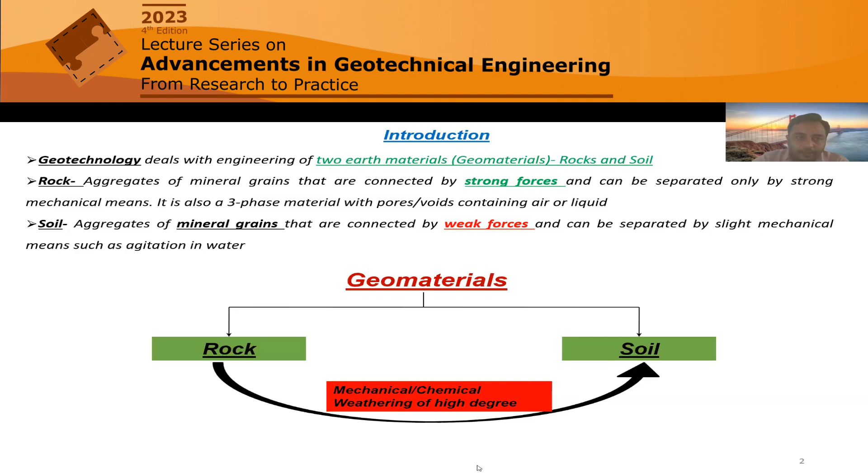As a geotechnical engineer, particularly if we are dealing with rock engineering projects, we have to deal with problems associated with rock slopes, tunnels, foundations, foundations over slopes, and many other problems. These are some examples in which we have to deal with rock mass at the site.

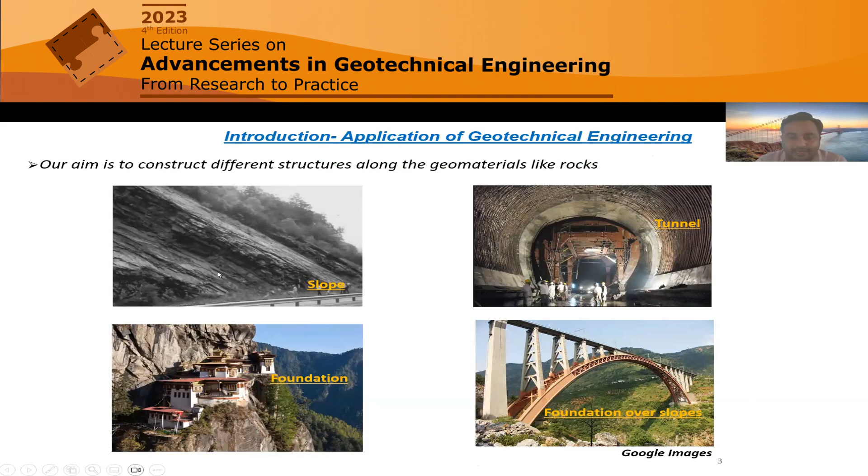Rock, intuitively speaking, when we are talking about soils and rock, rock is a stronger material. We can say that intuitively. However, the problem associated with rock engineering is the presence of discontinuities along the rock.

Due to the presence of these discontinuities, this whole assembly of discontinuity and the intact rock in between is known as rock mass. This whole rock mass on which we have to construct our structures becomes less strong, more deformable.

There will be anisotropic behavior shown due to the presence of discontinuities. Due to the random distribution of these discontinuities along the rock mass, there could be heterogeneity. Scale dependency in the properties comes into picture, and the behavior also becomes time dependent, as we see in the direct shear test when we perform our test under different strain rates or displacement rates.

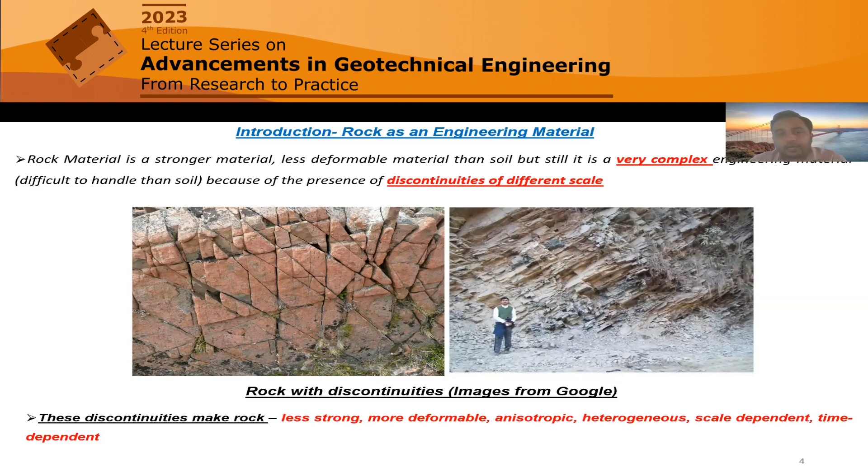When we try to design any rock structure, basically we have to deal with certain steps. There can be some specific steps associated with a particular project, but in general, these are the steps which we generally follow when constructing any rock structure.

Initially, we have to do some geological and topographical investigation at the site. Then we have to do some field observations and measurements at the site, which consist of intact rock characteristics, joint characteristics, joint and discontinuity characteristics.

This includes roughness, JCS, density and pattern of joints, ground details which includes stresses and groundwater table, and some project related features, meaning what type of project we are dealing with—whether we are dealing with slopes or tunnels.

Based on all of these, we can give some rating to these individual parameters. Based on the ground condition, the project related information, and these characteristics, we can find out what could be the possible failure mode along the rock structure.

So if we are talking about rock slopes, there can be different failure modes like planar failure mode, wedge failure mode, and stress controlled circular failures.

Based on this information, we can have some preliminary idea of what type of failure our rock structure can have. This can happen in tunnels also, where we have wedge failures and continuum type shear failures. All this preliminary investigation and analysis can be done on the basis of this information.

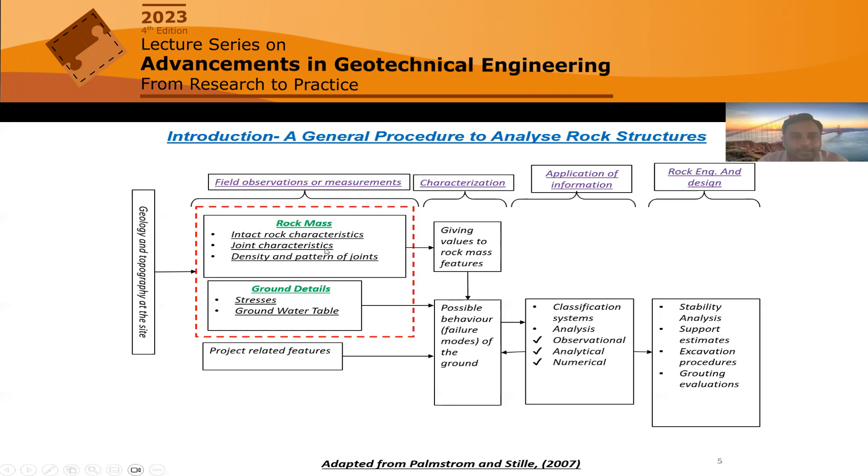Whatever design process we are actually following, we have to find out different properties or characteristics associated with the intact rock, joint characteristics, density, stresses—any input parameter which is required, we have to measure or estimate it in the field.

So the most ideal condition could be that whatever parameters or properties of the rock mass we are estimating in the field are precise values, deterministic values, and have a fixed value.

If we have some mathematical model to analyze our structure—suppose for a tunnel, if I am doing some analysis using a finite element code, finite difference method, convergence confinement method, or any other method—it requires some input parameters.

So if we have a precise or fixed value of that input parameter, we just input that value into the mathematical model, and we can get the output response of the structure which we have to deal with.

This is what is being given here. Suppose we want the elastic modulus of the intact rock from the site. The basic idea I want to give through this slide is that if we get a fixed or precise value of this elastic modulus, then we just input this simple deterministic parameter into the mathematical model to get the output response of the tunnel, for example, in this particular case.

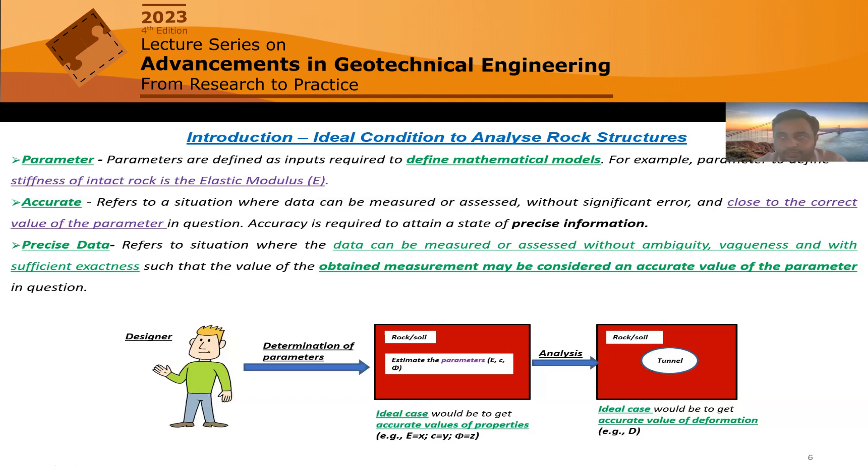However, this ideal case is rarely present in rock engineering. The thing is, we basically have to deal with unpredictability while estimating the input rock parameters. Unpredictability actually tells you about all our deficiencies and inabilities to precisely predict the value of a particular parameter.

So the ideal case was that if we have some mathematical model, we input the deterministic value of the input parameters, and we get the output parameter.

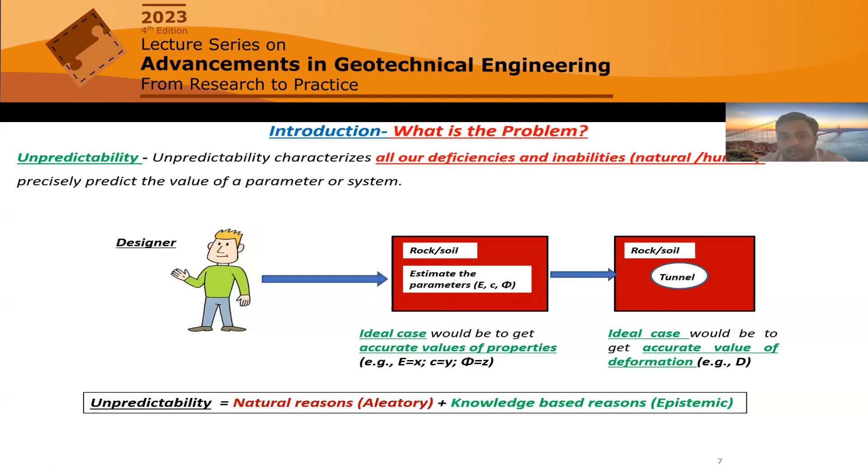However, even if the mathematical model we are very sure of is present, the inputs may not be fixed or precise. This could be due to two major reasons: the first is the natural reason, also known as aleatory variability, and the second is knowledge-based reason, also known as epistemic uncertainty.

Epistemic uncertainty I will discuss briefly in the coming slides. Aleatory variability is associated with the natural or inherent variability of the rock, present due to random orientations of different types of mineral grains along the rock. There can also be differently oriented, randomly oriented discontinuities present along the rock in the form of intra and intergranular cracks.

So the cracks could be along the grain boundaries, or they could be passing through the mineral grains themselves. In both cases, these discontinuities are randomly oriented along the whole domain of the rock we have to deal with, and therefore this inherent variability becomes important when estimating rock properties.

The best part is that when dealing with aleatory variability, we can use some traditional stochastic model to handle it. The idea is, suppose we want to estimate the UCS of intact rock, so if we keep on testing...

We generally extract samples from some locations or boreholes from the site, bring them to the laboratory, and test them. Based on a limited number of tests, we can get some idea of what trend the UCS value of the rock is following, and assign some stochastic model to that. So the best part is that aleatory variability can be handled using standard stochastic models.

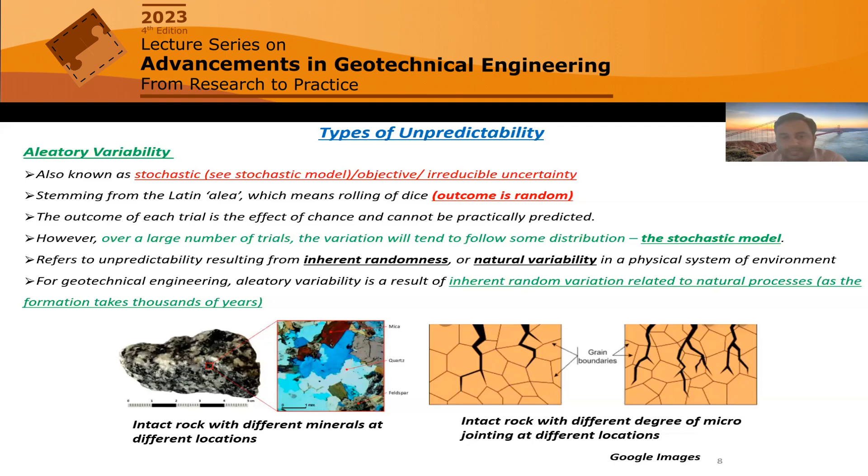So when dealing with aleatory variability, we are assuming we are dealing with objective data. What do we mean by objective data? If I'm talking about UCS, if we have the same samples tested in different laboratories as per standard guidelines like ISRM, we should be getting the same value. There are no personal feelings, opinions, or experiences associated with the laboratory testing when doing the UCS test. Similarly, for elastic modulus, if we follow the standard procedure from the stress-strain response of the intact rock, we should not get different results.

The basic idea is that the output is completely free of personal feelings, opinions, experiences, or any biases. Once we test some number of samples in the laboratory, we can fit a probability model on the data using well-defined statistical methods. Even if you keep testing 25, 50, or 100 samples, the aleatory variability cannot be reduced to zero. The inherent variability will always be there.

For preliminary investigation, if I have this distribution based on limited test data, and I keep testing more and more data, I can reduce this variability, I can reduce this uncertainty, but it cannot be reduced to zero. We cannot have a fixed value of any input parameter we want to estimate.

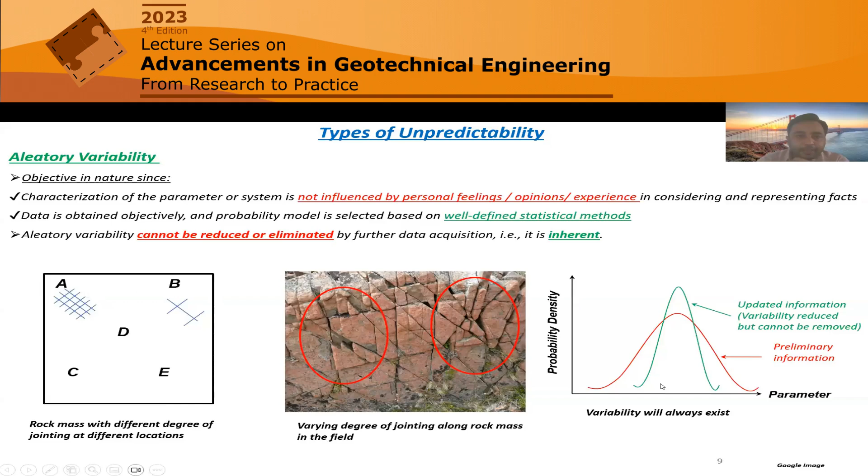How to deal with this variability? The best or simplest part is to ignore it, which we generally do. So what we do, we test some samples, we find out the average value, and we use some deterministic mathematical model based on which we can actually find out the output response of any structure.

Method two is being conservative. We will take the least or worst case scenario. If suppose I'm talking about UCS of the rock, we will take the least UCS value which we have estimated from our samples. We will design our structure based on that least value of the UCS, and then it will be resisting everything. So if you have that much money, and money is not a problem, you can go with it.

Third one is using the observational method, in which what we do is have some preliminary design related to any structure, then we can keep on monitoring that particular structure, how it is actually behaving. Based on that, you can have subsequent designs if the structure is not performing up to the tolerable limit, and otherwise if everything is going fine, you can carry on with that particular design.

And the fourth one is quantifying uncertainty, which is more mathematical, slightly difficult and unconventional for design engineers. In method 4, you have to characterize the uncertainties in the inputs using probability or statistics, and then you can propagate those uncertainties of inputs to the outputs using some probabilistic or reliability methods.

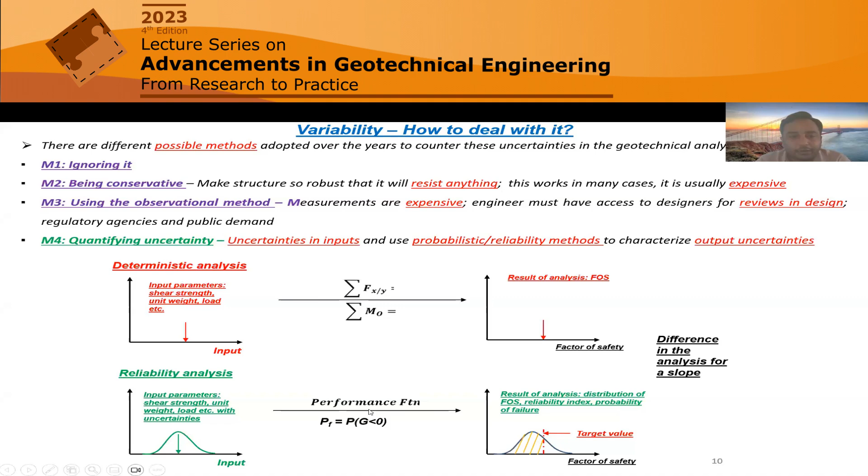So probability of failure, for the factor of safety, is defined as the probability of the factor of safety less than this target value. This hashed portion shows you the probability, and that can be defined as probability of failure. So reliability analysis actually helps us to deal with the variability of the input properties.

How do we perform this reliability analysis in geotechnical engineering? We have to use two mathematical techniques. First one is statistics, in which we have to quantify the uncertainty associated with the input parameters, and then we have to use probability theory to find out the likelihood of specific events on the outputs, considering the quantified uncertainty of the inputs.

Standard statistical techniques are there: chi-square test, KS test, AIC value test. And you can also find out the statistics of these parameters based on the tested data.

If the design decision is not sufficient, or the stabilization measures are not sufficient, then you have to repeat this whole process with some different amount of stabilization measures and all those things.

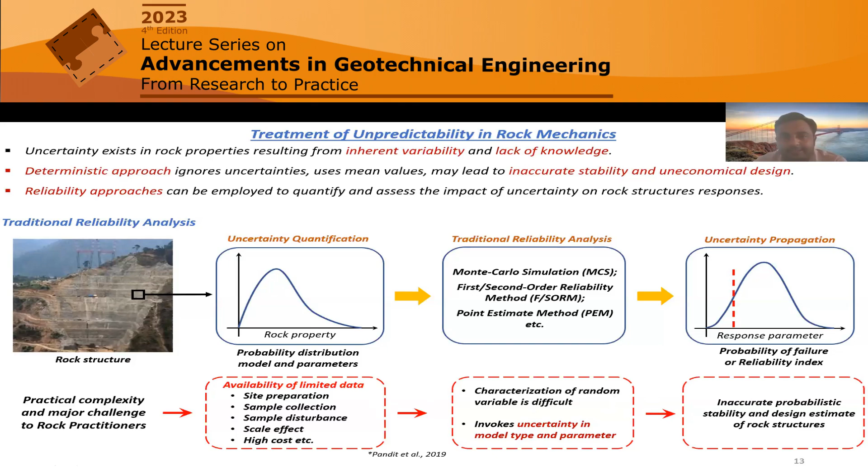So since we have limited data, whatever statistics of the data or whatever probability model you are fitting on that data, that could also be imprecise. And that will actually result in the imprecise estimation of the probability of failure, or reliability index or sensitivity indices, which we will be talking about later. So the problem which we are dealing with in this particular presentation is that if you don't have enough data even to get this probability model and the statistics of the input, then what to do?

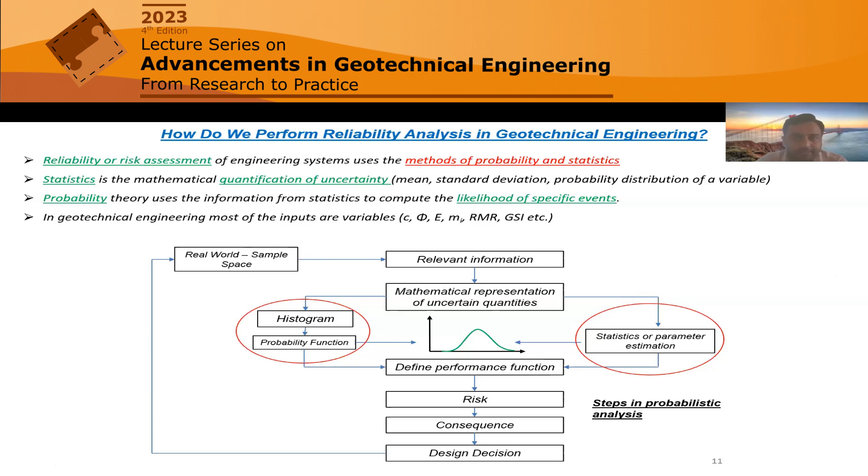We are assuming in the reliability analysis that we have sufficient data to get the precise probability model and the precise value of its parameters. But if we don't have those precise probability models and precise value of statistics, then what to do? This is what we are dealing with. We are not talking about qualitative sources of epistemic uncertainty, we are talking about quantitative sources of epistemic uncertainty.

The simplest way, as I was telling you, there could be several other methods. We are currently using Bayesian techniques, and non-stochastic models like convex modeling and interval analysis to deal with this issue of limited data. However, the simplest method we found to approximate the epistemic uncertainty related to the input, and propagate that uncertainty to the output, is to augment our traditional reliability analysis or sensitivity analysis method with standard statistical techniques like bootstrapping or jackknifing.

So what are these statistical techniques? Suppose we have some original sample with n data points, 1 to n. You can generate dummy samples out of this original sample using bootstrapping or jackknifing, and you can treat these samples as the replacement of the original sample itself.

If you keep on doing the sampling of the same sample size from the field, you can have different values of the parameters associated. But instead of doing that, you reconstitute this original sample to get the bootstrap resamples or jackknife resamples, through which you can estimate the uncertainties associated with the parameters of this particular input.

Suppose I'm talking about the mean. You can find the mean of the input based on this original sample, but you can also find the mean based on the bootstrap sample or jackknife sample. For bootstrapping, you randomly pick any data points, and you have to do this with replacement of the data point. You can do it like 10,000 times, so you will have 10,000 values of mean of this input. Based on that, you can find the variation or uncertainty associated with the mean of this particular input.

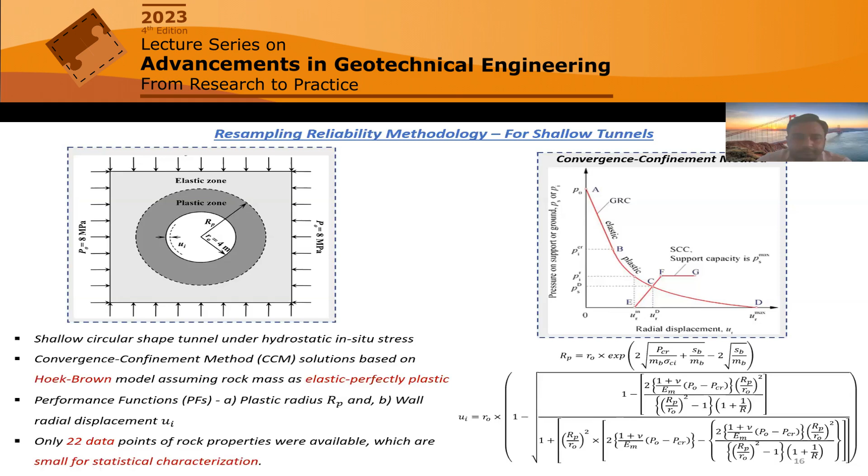What we got related to the analysis is that when we are doing the resampling and estimating the statistics of the inputs, we are getting the variability or uncertainty associated with the statistics themselves. So if I'm talking about the mean of the UCS, there is not a single value which you are getting from the original sample, but a complete range or variation.

This variation is actually showing how much epistemic uncertainty lies when we are estimating the statistics of the inputs. Something similar happened to the standard deviation of the UCS, where instead of a single value from the original sample, we have a whole variation due to limited data availability. For this problem, the amount of data available was only 22 data points.

For each of these bootstrap samples, once we get the sample, we get the best fit model and the parameters associated with that model. Based on that, we generate samples using Monte Carlo simulation based on the probability characteristics of this bootstrap sample, and we find out the probability of failure or reliability index.

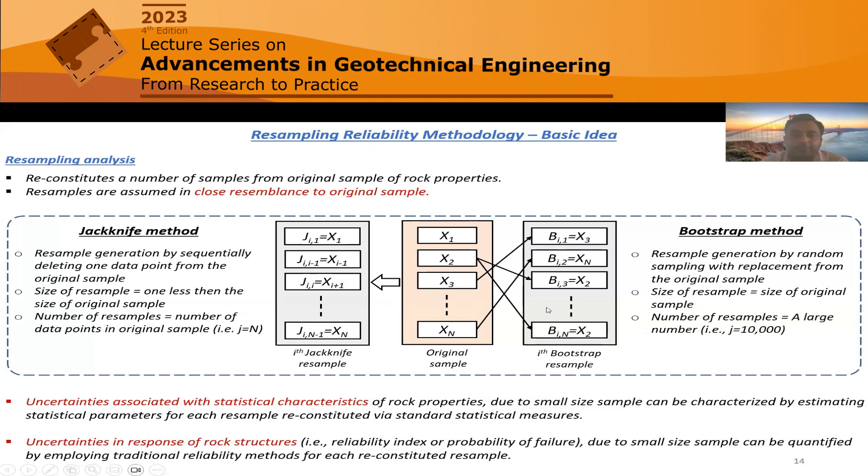We do this for all the reconstituted samples. So suppose for the bootstrap method, we have 10,000 reconstituted samples or resamples. Therefore, we will be getting some 10,000 values of the probability of failure.

Ultimately, it is a mathematically simpler method because we are using the traditional reliability method, but we have to repeat that process for all the reconstituted samples generated using bootstrap or jackknifing technique. So instead of the probability of failure, we are dealing with the whole distribution of the probability of failure, due to the epistemic uncertainty associated with the statistics of the input parameters of the rock mass.

These three curves show that if we consider the uncertainty in both the model types, fitting different models for different bootstrap or jackknifing resamples, that could be the first case. The second case is that you have fixed the probability model based on your original sample, but you are considering the uncertainty associated with its parameters based on the different bootstrap samples.

So you can see if we are ignoring the uncertainties associated with the parameters of the probability model, then the uncertainty is significantly underestimated as compared to the other two cases where we are considering the uncertainty in both the probability model and the parameters.

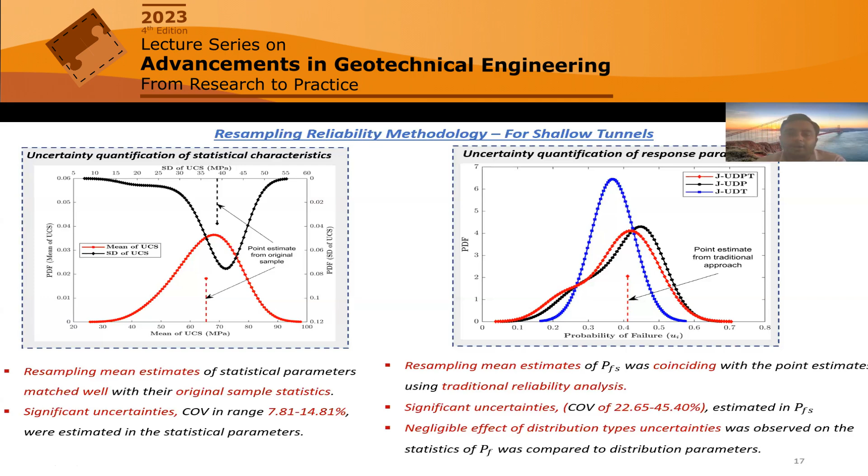In the second case, we are ignoring the uncertainty associated with the distribution type, but we are considering the uncertainty associated with the model parameters.

For the deep tunnels, what we have done is used the FLAC 2D CWFS continuum model, with three performance functions. First is the extent or depth of the damage zone. Second is the displacement of the roof. Third is the displacement of the wall.

The CWFS model's basic idea is that non-simultaneous mobilization of the strength components is taken into consideration.

If I'm talking about Mohr Coulomb strength criteria, what we generally assume in the traditional Mohr Coulomb strength criteria is that C and phi are mobilized at the initial strain level.

But in the CWFS model, we assume that as there is an increase in the plastic strain, the bond between the mineral grains keeps on degrading. Therefore, the cohesion due to the bonding between mineral grains keeps reducing before getting constant. And since there is bond breakage, there will be mobilization or motion along the mineral grains. The friction keeps on mobilizing before taking some constant value.

These are the plastic strain values for cohesion and for friction angle, at which the mobilized friction angle and the residual cohesion become constant. These types of problems generally happen when the rock mass at the site is massive, where the GSI value exceeds 65 or 70, and there are high in situ stress values present.

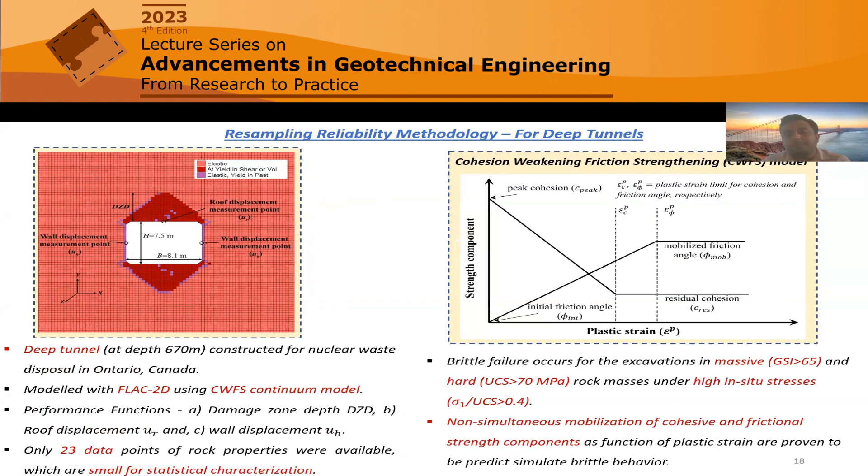However, the analysis remains more or less the same, where we have to generate the bootstrap and jackknife samples of the input parameters of rock mass, estimate again the epistemic uncertainties associated with the statistics of those input parameters, and estimate the uncertainty associated with the probability of failures. So this is what we are getting for deep tunnels.

So suppose if I'm talking about UCS, again you can see this is the fixed value of the standard deviation of UCS and the mean value of the UCS based on the original sample. This variation is actually coming out due to the bootstrapping or jackknifing which we are using. Once we try to propagate this uncertainty of the input statistics to the output, you can see how the probability of failure is actually coming out.

You can see again that when we are ignoring the uncertainty associated with fitting any probability model, there is little difference. But when we ignore the uncertainty associated with the parameters, you can see how the uncertainty is significantly underestimated in the probability of failure.

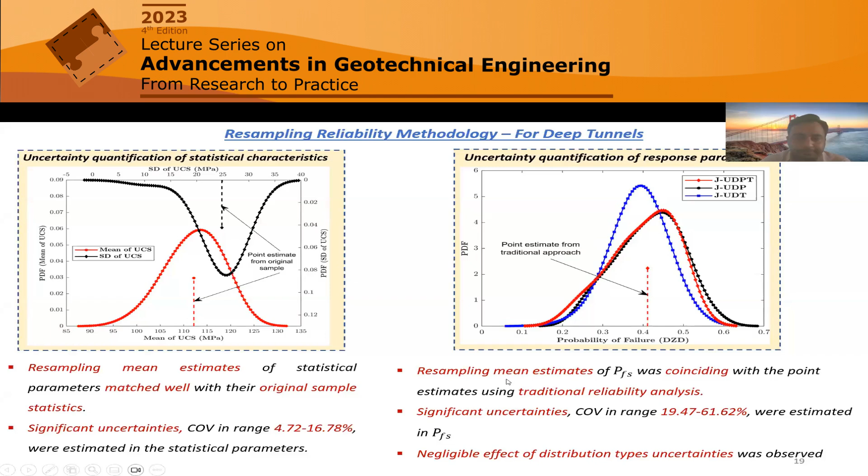So we have extended this method to global sensitivity analysis of rock structures also. When we deal with sensitivity analysis, it is an important technique to provide the importance ranking of inputs. By importance ranking, we mean we can find out what properties are most important.

Or what properties are non-sensitive to the outputs of interest. This in turn helps us to have effective allotment of the available resources.

You can't do infinite number of in situ tests. So if you have available resources, you will use those resources to estimate the sensitive properties as compared to the non-sensitive inputs. And mathematically, if you want to reduce the computational efforts in reliability and probability analysis, you can ignore the uncertainties associated with the non-sensitive properties, but consider the uncertainties associated with the sensitive properties only. This will reduce the computational effort associated with the reliability or probability analysis.

So when we deal with sensitivity analysis, there are two basic sensitivity analysis methods which we generally use. First is the local sensitivity analysis method, in which we estimate the sensitivity of the input at a given point of the domain. In the global sensitivity analysis, we consider random points along the whole input domain.

So when we are estimating the sensitivity using global sensitivity analysis, that means we are considering points along the global domain of the inputs. We have different techniques associated with global sensitivity analysis. The basic idea behind the global sensitivity analysis technique is that you have some output related to the inputs.

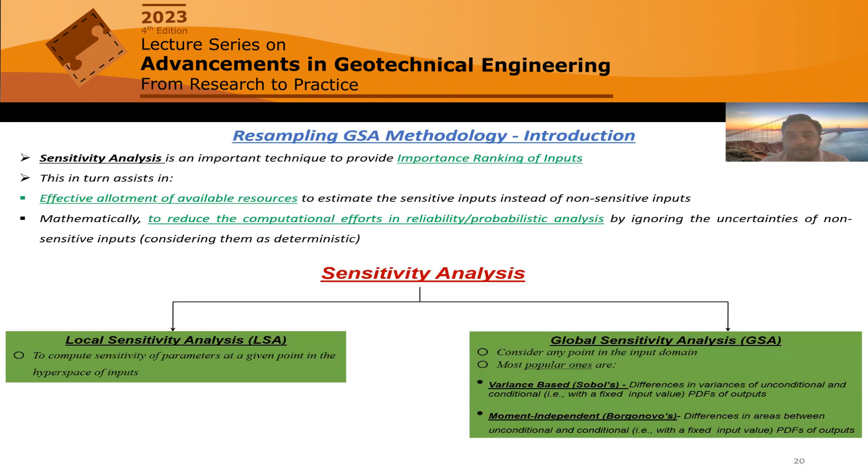So based on the type of parameter or statistic you are dealing with while estimating global sensitivity analysis, you have different methods like the variance-based Sobol's analysis method. If you are talking about the difference in the variance of the output, that's Sobol's variance method. If you are talking about the whole probability density function of the output, you are talking about moment-independent Borgonovo's GSA. We have used Borgonovo's GSA because it considers the complete PDF, not a single statistic, so there is no loss in information.

The algorithm we generally use is the Monte Carlo simulation based subclass method. I'm not getting into the mathematics of it, but the basic idea is that you have some probability density function, shown here as f(y), associated with the variance or uncertainty of all the inputs. If I fix the value of xi to some value, what probability density function do we get?

Then we quantify the differences existing in the probability density function for both cases, and that tells you how sensitive the particular input is. If the difference is significant, that means the parameter is significantly affecting your output. To quantify the sensitivity, we generally use Borgonovo's sensitivity indices, which can be quantified using this Monte Carlo simulation subclass method. If you're interested, I can share those mathematical details, but I have not shown them in this presentation.

In this method also, we are using Monte Carlo simulation to find the sensitivity indices. To generate the Monte Carlo simulations, you need to know the probability model associated with the inputs and the precise statistics of those probability models to get realizations and perform global sensitivity analysis for any input. If these are not available, or if any parameter of the probability model is not available, or if the data is not sufficient, then there will be uncertainties associated with those probability models and parameters, and this will affect the sensitivity indices we estimate, since we assume the statistic and probability model from limited data is accurate enough, but actually it is not.

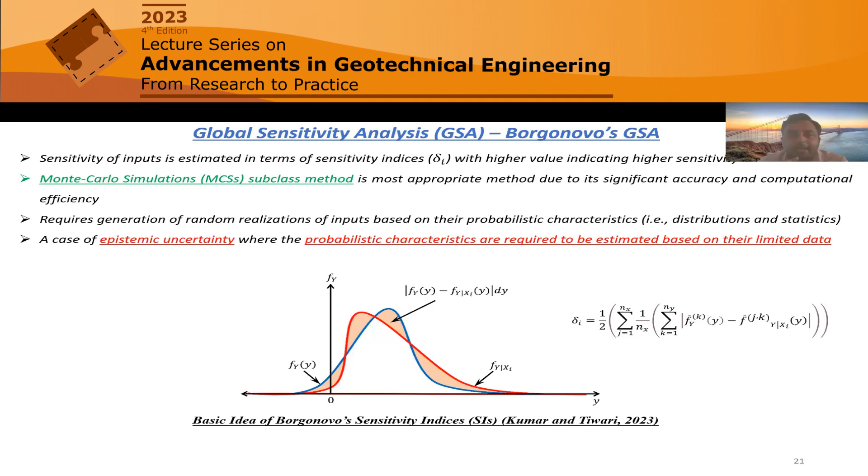So we use this resampling global sensitivity analysis method, where we have the original sample and a reconstituted sample based on the bootstrap technique and jackknifing, as I mentioned. Considering each reconstituted sample as an independent sample, you can perform Borgonovo's GSA as in the traditional calculation, finding the sensitivity analysis of any property for all the reconstituted samples in a similar way. Once you do it for all reconstituted samples, you will have a distribution of the sensitivity indices instead of a single value.

And there will be statistics associated with the sensitivity indices, which we generally do not see in rock mechanics and geotechnical engineering. We are habitual of using a single value or a fixed value of the sensitivity indices, based on which we find out the rank of the parameters based on their sensitivity on the outputs of interest. But this is not the actual case.

If the data available is not sufficient enough, then you can't have a precise single value of sensitivity indices. What we generally do, even on limited data, is fit some model, and find out those parameters based on that limited data, based on available literature, based on experts' opinion. So generally the distribution we use for any property in geotechnics is log normal distribution. Even if it is not fitting well, we assume the distribution is log normal. We do all our analysis and find out a single value of sensitivity indices for any input.

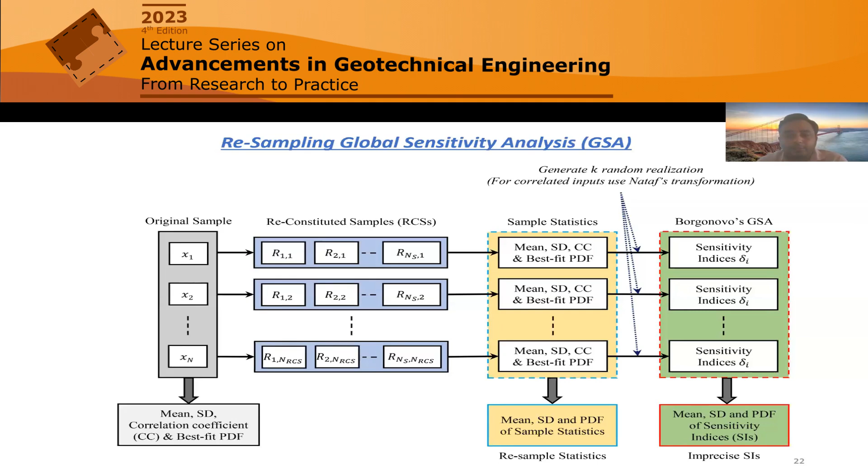So that is the whole idea behind this resampling global sensitivity analysis method. We have performed this analysis for a rock tunnel, a shallow tunnel, again with the same performance function of displacement and plastic radius. We have done the sensitivity analysis only for the wall convergence, that is UI. Everything else is the same: we have assumed the rock mass to be a Hoek-Brown material, and the performance function has been derived using the convergence confinement method. All these details have already been explained and shared with you.

So what do we want to find out? We want to find out, for this UI, what are the sensitive parameters? If I'm talking about EM, MB, SB, you can see there is a ratio RP upon R naught, which includes all the inputs related to rock mass strength properties. So we have to find out the sensitivity of these input parameters.

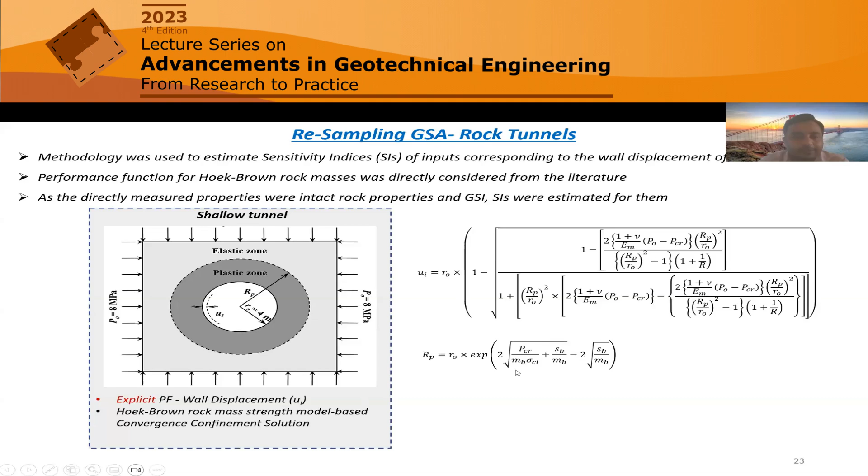And these rock mass properties are themselves a function of intact rock properties, which we generally estimate directly. So the intact rock properties are the properties which we directly estimate using laboratory testing. Indirectly, if we can find out the sensitivities of those intact rock parameters or rock mass classification ratings, we are indirectly estimating the sensitivity of these strength parameters. Why are we estimating the sensitivity of intact rock parameters? Because you are actually measuring those parameters in the field, so you have to allocate resources for the estimation of those parameters. You are not directly estimating the parameters associated with the rock mass, that is MB and SB.

However, the question is: can we estimate, or can we have 250 samples tested for UCS value, tested for elastic modulus and other properties?

That is the biggest question that we have to practically deal with. So these studies have some practical implications that I want to discuss. Right now, what we know after this presentation is that our target is to get a precise and true value of a rock property, which is impossible to get.

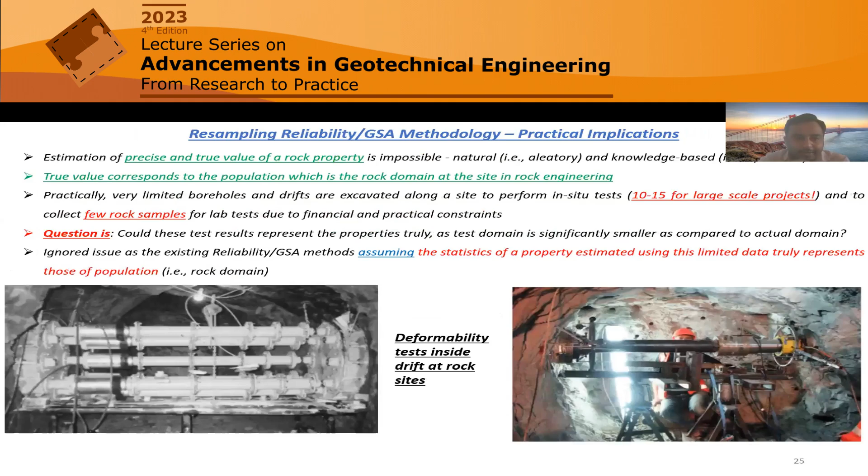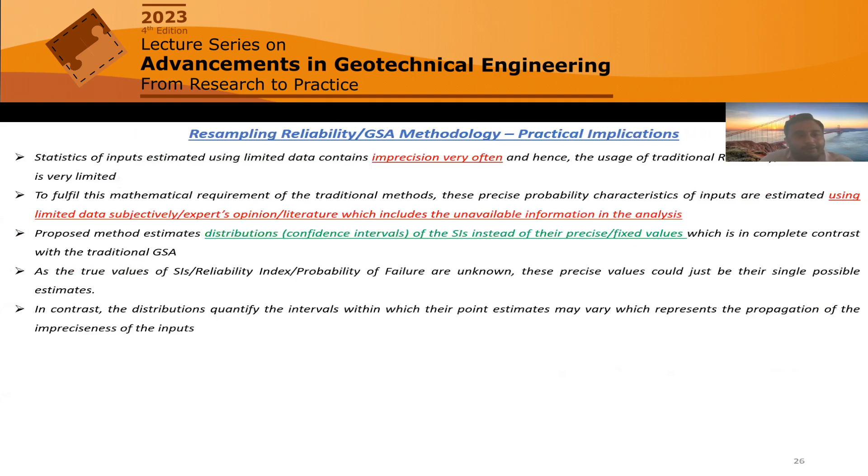However, for resampling GSA, you are estimating the distributions of overlapping sensitivity indices. So we're getting the distributions of sensitivity indices, and these distributions are also overlapping. So you will have another probability associated with the distributions, the sensitivity indices, or the importance ranking of the parameters. This is a major hindrance.

When you are trying to use this particular methodology for practical field applications, we are working on it, but it may take some time. And further, the rock practitioners or designers with little background on uncertainty quantification and probability theory might find it difficult to deal with or interpret the results we are getting.

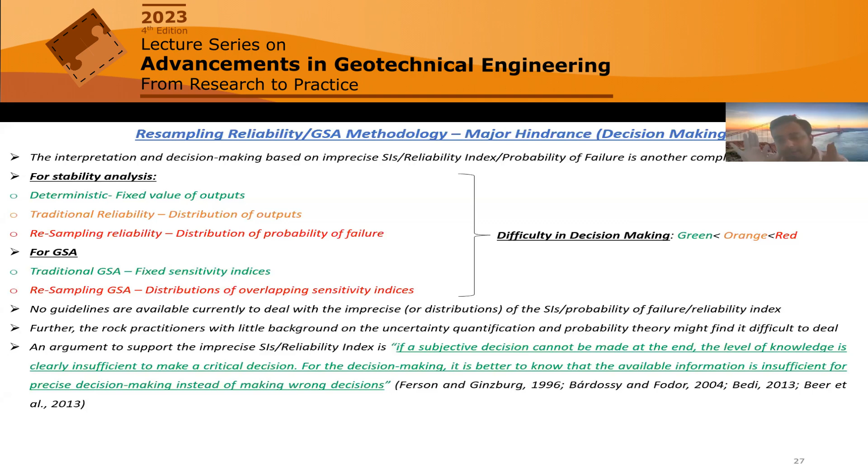But an argument to support the impreciseness in the sensitivity indices, the reliability index, or the probability of failure is that if a subjective decision cannot be made at the end, the level of knowledge is clearly insufficient to make a critical decision. For decision making, it is better to know that the available information is insufficient for precise decision making instead of making wrong decisions. So at least you will be informed that you need more data to get the converged value of the probability of failure, reliability index, or sensitivity indices.

The major conclusions are that when we are talking about stability analysis of rock tunnels, we have to deal with aleatory variability and epistemic uncertainties both. Epistemic uncertainty is obtained in statistics of inputs due to data insufficiency. There can be other sources also, like qualitative reasons, which I was telling you.

Coupled methods like jackknife or bootstrapping statistics with traditional reliability and GSA methods could be a solution to reflect the effect of data insufficiency of inputs onto the statistics of output.

Among the two resampling reliability techniques, jackknifing and bootstrapping, the results were actually very much overlapping. The computational effort involved in jackknifing is much smaller compared to the bootstrapping technique. The reason is that the number of reconstituted samples involved in jackknifing is much smaller compared to bootstrapping sampling, where you have to get reconstituted samples in the thousands. In the jackknife sample, you are dealing with a number of samples one less than the original size of the sample.

The coupled method provides the distribution of reliability index and probability of failure instead of their fixed estimates, reflecting the effect of statistical uncertainty of rock properties.

However, we are also comparing these methods. They are mathematically much simpler, and anyone equipped with basic probability theory and basic reliability theory can use it to get some idea. But we are at the stage where we have already communicated this work, and we are verifying this technique with Bayesian techniques and other non-stochastic techniques to find out how accurate they are, since they are mathematically much simpler. If they are more accurate, then we can go ahead with these methods.

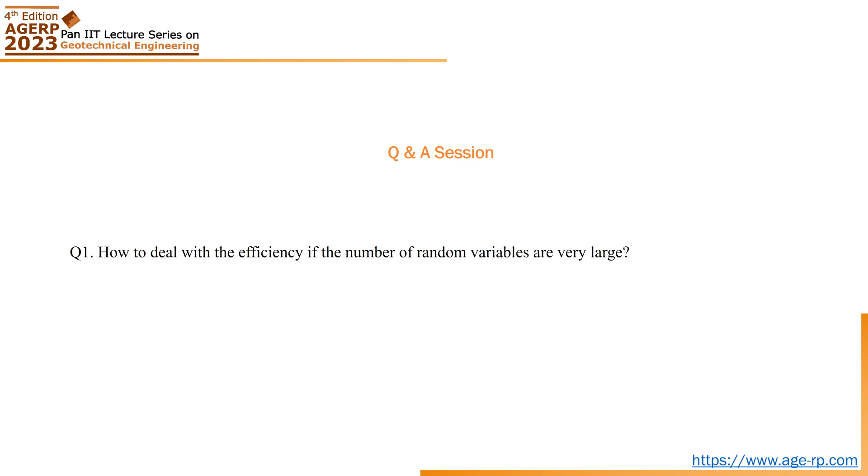But what we can do is use some response surface methodologies where we have an explicit relation between inputs and outputs. Now we have advanced methods where we can relate many random variables to the output. That will actually remove the calculation part where we have to run numerical simulations many times. This is how we can deal with that issue. But we have not done any problem related to these many random variables, like 15 variables, so we have to check it first.